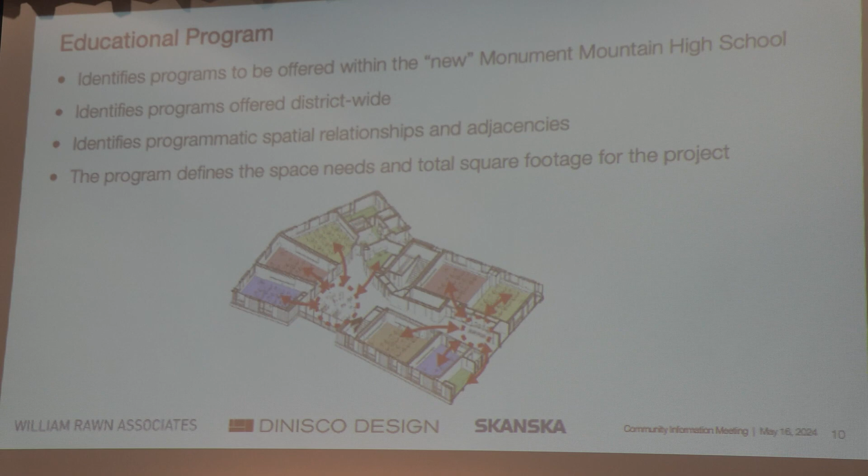So in addition to the spaces that are needed to support the program, we also want to spend time to really understand what the spatial relationships and adjacencies are. What's important there is so that you'll see what the priorities and goals are to create a collaborative environment. We want to make sure that we maximize time on learning, but we also want to make sure that the programs are co-located to support the entire student.

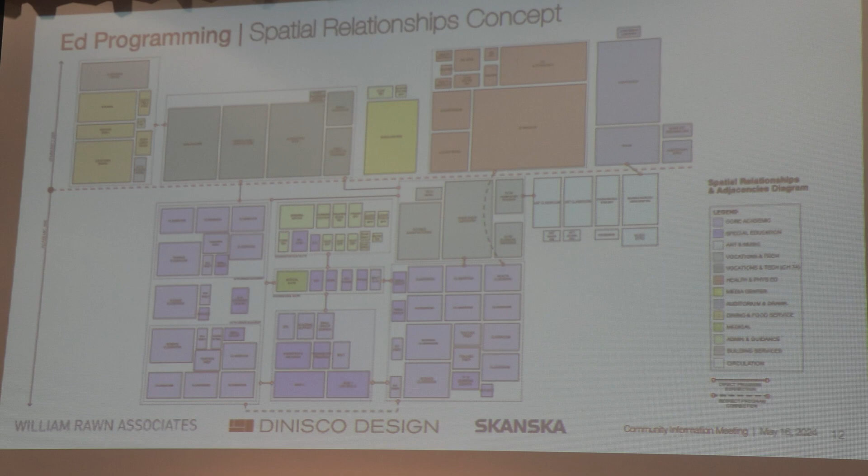We've spent a lot of time talking about project goals. We have heard from a lot of people. We are still looking for more input. So for all of you tonight, we'll tell you where you can log on and provide information, but we'll also have an opportunity for you to ask questions or even tell us what your goals are at the end of the presentation. But what we've heard to date is cost is pretty important.

It is an important consideration for any project. We recognize that, more importantly, here. And so we're very keen on making sure that we maximize every dollar that you have. What also is very important is the educational program, right? Making sure that it will withstand the test of time for the next 50 to 75 years.

It needs to be flexible and adaptable. And we need to create those connections between programs and disciplines. We don't want a wing just for CVTE and then the core academics on the other side. The dynamic engagement between the two will really enhance and supplement students' engagement and collaboration.

Health, safety, and welfare is an important component as well. And then sustainability is on the top of all of our minds as we think about climate change, and how we can actually improve the quality of our lives using less energy. And then as well, the community. We're all in this together. What can we do to support the community and the community use of the spaces?

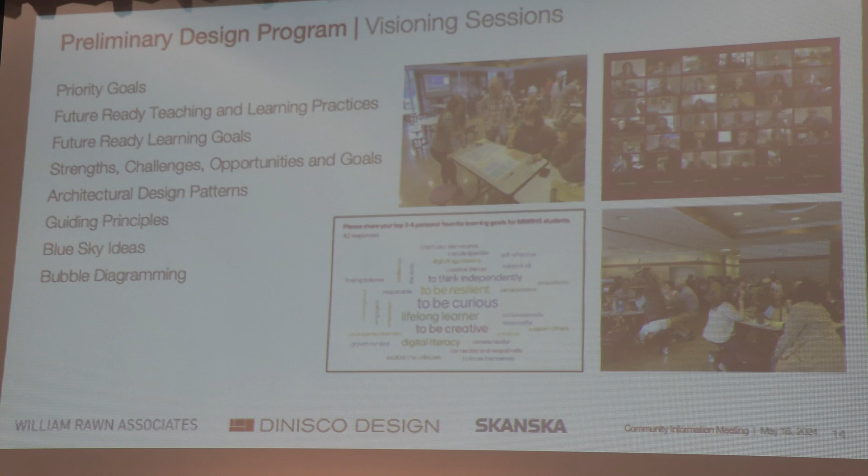We asked about design patterns, and we'll talk about that, and even some blue sky ideas. We had a great outcome from all of these engagements. I think we had 3 community meetings - we did one with the staff, and then one full one for the entire community.

So educational priorities, which really match what I just mentioned earlier: safe and welcoming, integrated program cross-disciplinary connections, flexibility, diversity and inclusion, collaboration, social emotional learning, which we all know is a really important component these days, our vocational opportunities and making those spaces accessible and appropriate for those students, visual arts, music, and performing arts, and then community partners, and also after-school programming. Again, how can we make sure this school is available for the entire community?

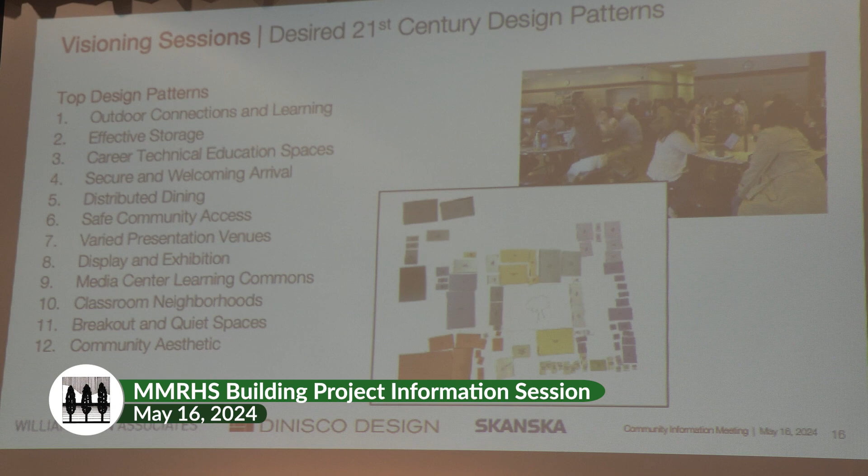We also asked people to start thinking about what are your top design patterns. It's kind of hard to think beyond what you know, so we started showing different pictures. We showed recent projects such as Mount Greylock, Taconic, and Wahconah, just to give people an idea of what you might be able to envision. And we heard you have an amazing site - we'll talk a little bit more about that.

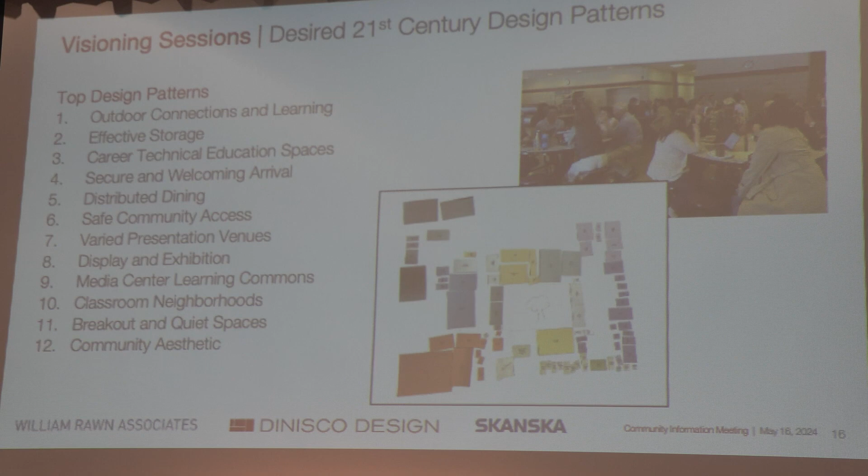The outdoor connections and learning really came to the forefront. Storage is really important as well - I don't want to go through the entire list, but even just display and exhibition space for these talented students would be really wonderful. Flexibility, breakout and quiet spaces, creating classroom neighborhoods for project-based learning and collaboration between students, and then making sure it fits into the community.

So with that, I am going to give you all a break from listening to me and turn it over to... I'm going to keep going on this.

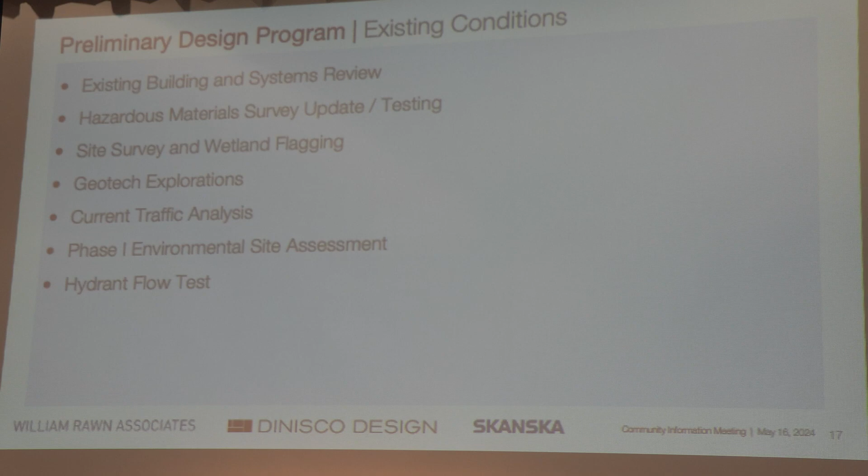Sorry, just joking. Okay, so while we were doing all of that, we were also kicking the tires. We came out, evaluated the building, looked at all of your systems. We confirmed the survey that was previously done, and we had to go through the whole Conservation Commission process all over again, so we had to do the wetland flagging and make sure nothing has changed.

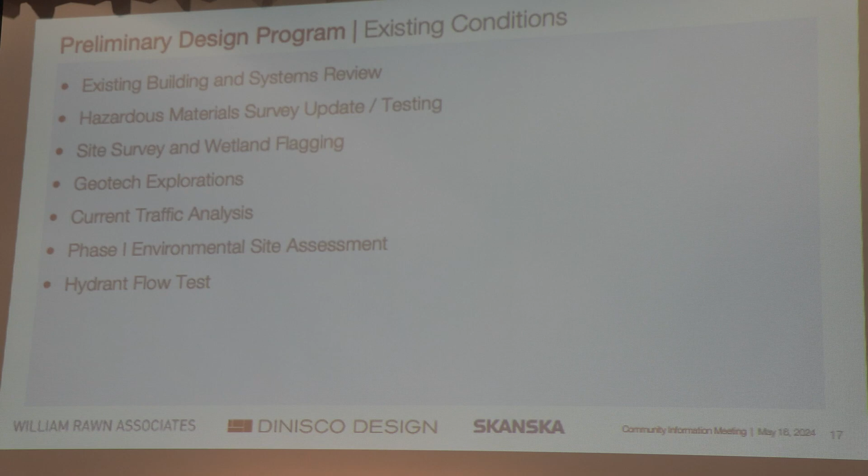We'll talk about the traffic - we understand how important that is, and we have done a thorough analysis on that. And then some minor miscellaneous items, making sure that you still have the deed and making sure that you have adequate water flow. So what have we learned?

As you all know, constructed in 1968, the building has probably served you well, but has probably exceeded its useful life as it is today. The windows are single pane original windows. They leak. The temperature going in and out of them makes it very difficult.

And so technology is dated, and safety and security are really important components that we didn't really think about back in 1968, as well as many doors, hardware, and everything else that really needs to be updated.

When we start looking at the spaces, suffice to say the original windows make it very difficult, drafty. You're in the cafeteria, poor lighting, even with all of those windows, not great natural light. Ventilation is a problem in most of the spaces as well. We're fortunate to have air conditioning in here.

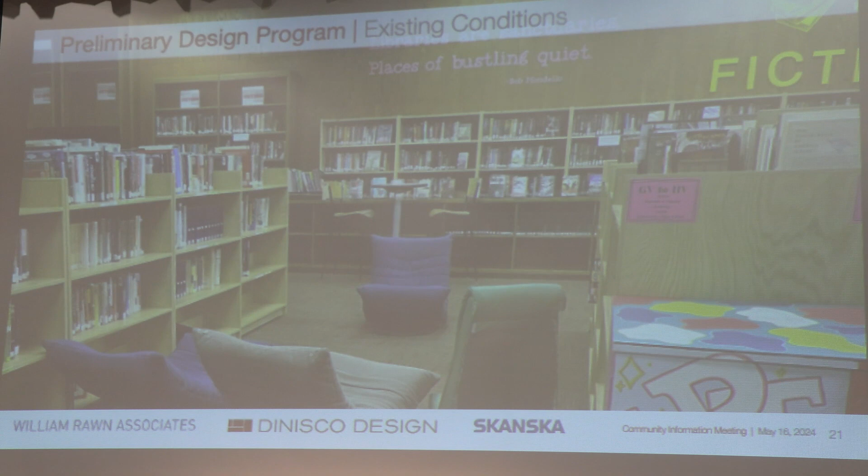There's very little area for collaborative work, for students to work together, for staff to get together and collaborate. No small breakout areas for any of the needs. Technology clearly is lacking. Even the light that's in there, while it's not natural, is also a challenge.

Your classrooms, your science labs, are undersized—significantly undersized to MSBA standards—but even just for today's programming they are fixed benches all the way around. It limits the flexibility and the opportunities that the programs could really benefit from.

We have a lot of classrooms that I think there's probably 10 that are interior classrooms. I don't know if anyone saw that—amazing use of existing space to do what you need to do. It would be great to have every program have windows and natural light, ventilation, air conditioning, technology.

Your art program, again, is just amazing—a pretty fun space here, but lacking light and technology. We go over to the woodworking, a great space, but we don't have the proper ventilation and all of the equipment needed to really support that program.

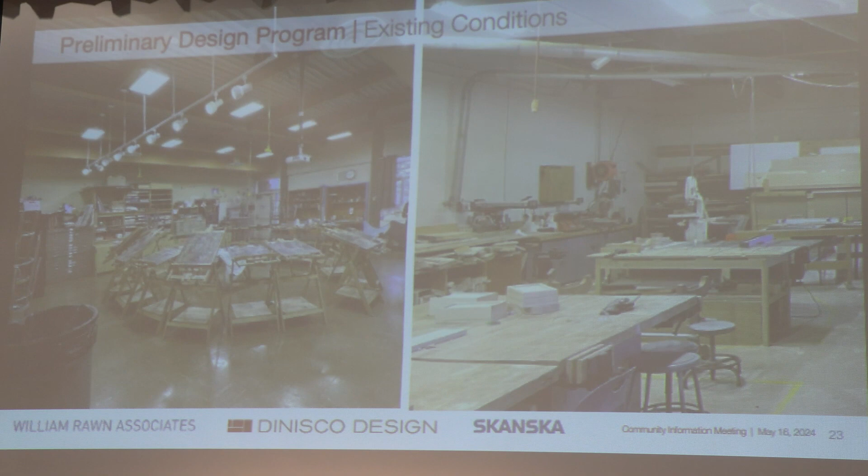So that's the existing interior descriptions. Now I promise I'm turning it over to Jeff.

Great, thank you, Donna. So in addition to the analysis of this building as a structure and also the program that goes on inside of it, of critical importance to the project is an analysis and a comprehensive understanding of the site which the building sits on. The district is also unique in that here's the high school, but here's your elementary school, and here's your middle school. The symbiotic relationship and an understanding of how that all works is very important to the success of any project here at the high school.

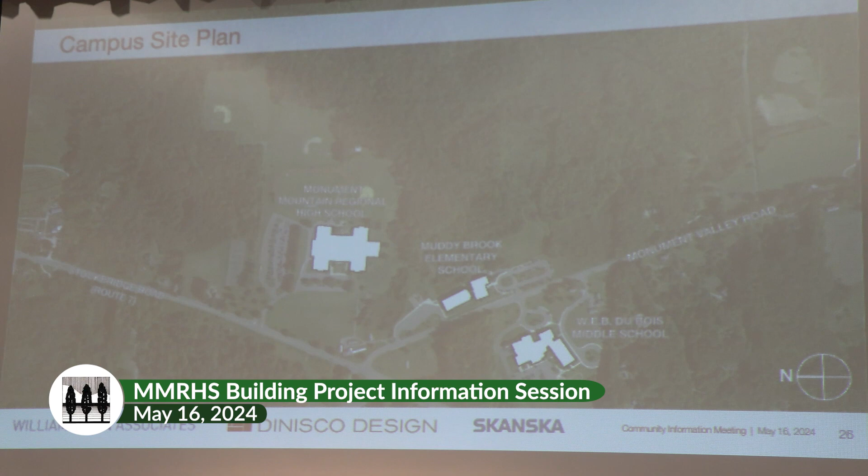A third major component is the natural environment on the site. You have a stunningly beautiful site here at Monument Mountain. We know there are wetlands on the site, so we'll be working, as Donna mentioned, with the Great Barrington Conservation Commission to make sure those areas are protected. We'll also be studying what areas below the surface are good for new buildings and how water moves through the site. Where does it go when it rains? How does the water get there? Does it pool in any areas that might make certain parts of the site undesirable for new construction, things like that.

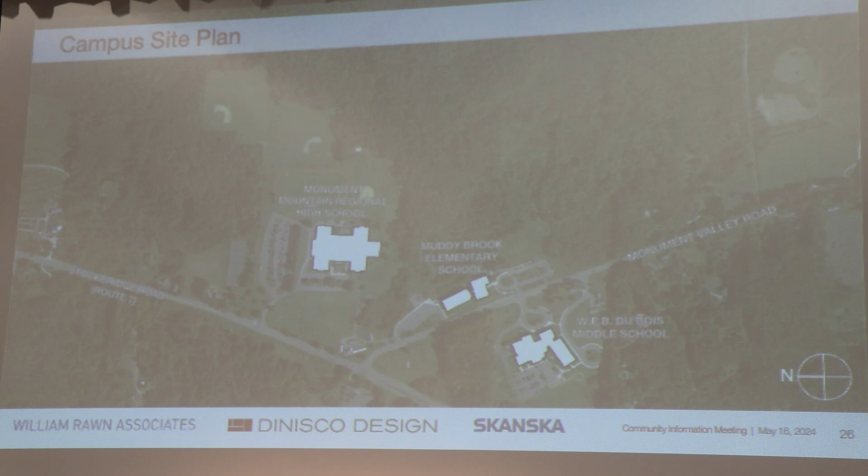We've heard the community's concerns over the safety of exiting and entering the high school site along Stockbridge Road. So one of the first things we did was perform a comprehensive site analysis of the campus.

We studied 3 intersections. The first is here at the driveway to the high school onto Stockbridge Road. We studied the intersection with Stockbridge Road and Monument Valley Road. And then we also studied the intersection across from the 2 other schools. We set up traffic counters along Stockbridge Road and Monument Valley Road, and between all these locations we were able to get very granular information: when the most traffic was arriving, when there was a lull at each intersection, who was turning left, who was turning right, who was going straight through.

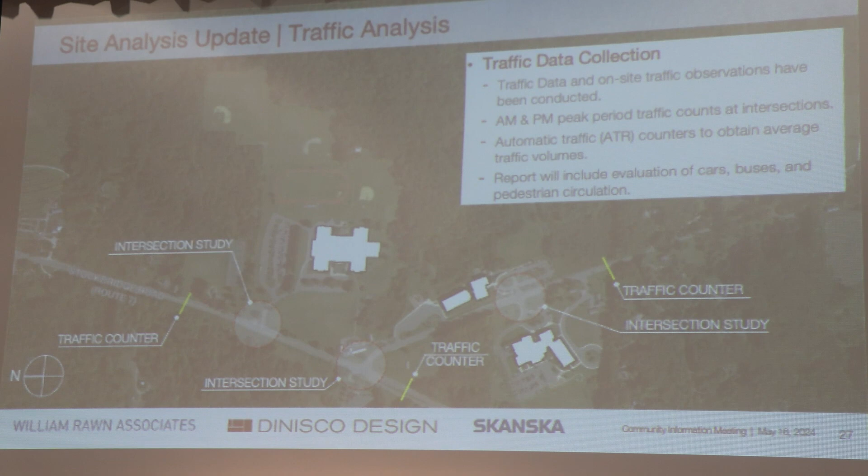So a comprehensive analysis of the traffic in this area will allow us to make recommendations or study some proposed interventions to improve traffic. We do have some considerations that we're studying as part of the project that we'd like to share with you. These are not final or proposed, but still in development.

One consideration might be the introduction of traffic circles or roundabouts along Stockbridge Road. This strategy reduces the rate of travel, slowing traffic down, which allows for increased reaction time, especially important with young or inexperienced drivers. The introduction of potentially a second traffic circle at the intersection of Monument Valley Road and Stockbridge Road would create a slow corridor, reducing the rate of traffic for a longer distance. It should also be noted that Stockbridge Road, Route 7, is a state road, so any intervention there would need approval and to be designed to Mass DOT standards.

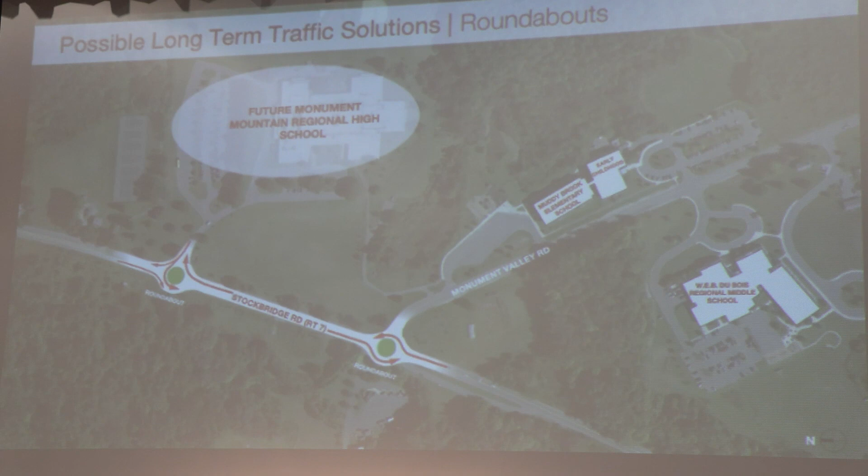Another potential strategy would be to make the driveway that currently exists at the high school one-way in only. That would eliminate the need to make a difficult left or right out of the school site, which is sometimes difficult when there are long queues of vehicles obscuring oncoming traffic from approaching the intersection. This would create a new connection down to Monument Valley Road, which is not a state road, so that would just be coordinated with Great Barrington, and all school traffic would flow out, controlled by the addition of signals or other means.

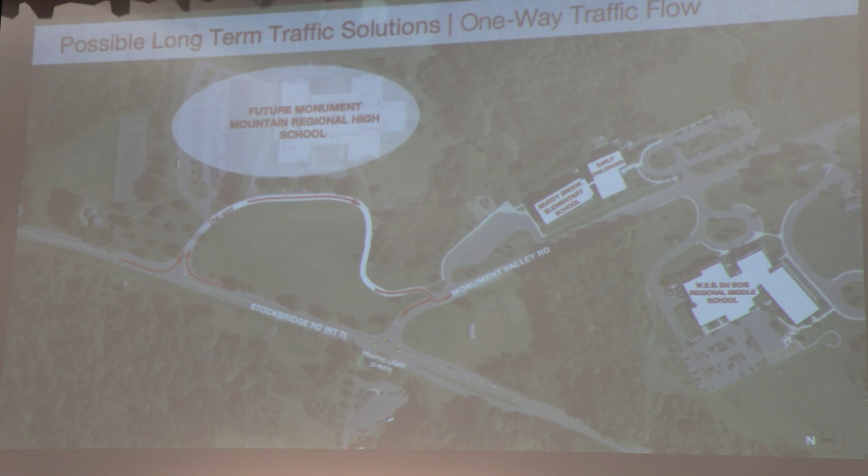A third consideration would be to get rid of the driveway in at Stockbridge Road altogether and use two-way traffic off of Monument Valley Road. Again, that intersection could be redesigned and controlled as needed. So these are three potential areas of study that the design team will be looking into as the project progresses.

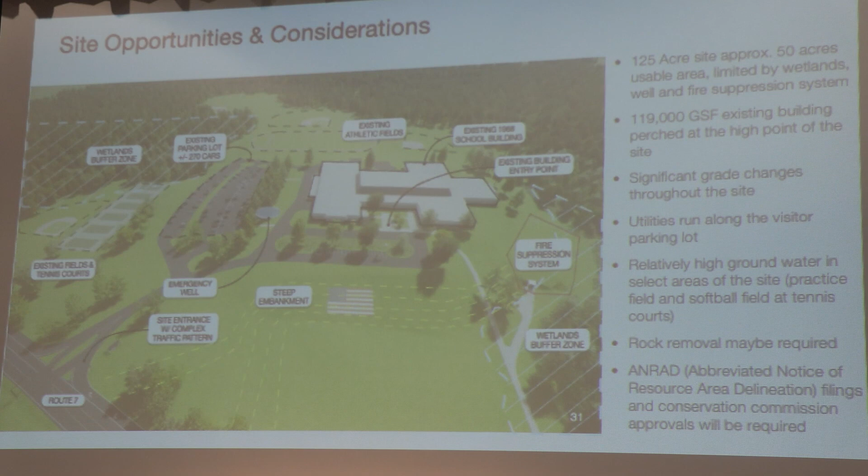With regard to our site proper, within the property lines of the high school, there are a number of opportunities and constraints that will inform us where on the site a project could potentially take place. Most notably is the existing building, about 119,000 gross square feet on the plateau on top of the school site. Working clockwise around this is the water storage facility, which we need to take into account in any site development. There's also the steep embankment out in front of the school, which the school uses so successfully in their messaging frequently.

There's the driveway off of Stockbridge Road here, which has a complex traffic pattern. We know that the existing parking lot has good capacity for the school as it exists. And one of the huge advantages to this site is the amount of play fields that you have in place. One of the things in evaluating the site for new construction, additions, or renovations would be to preserve as many of those as possible.

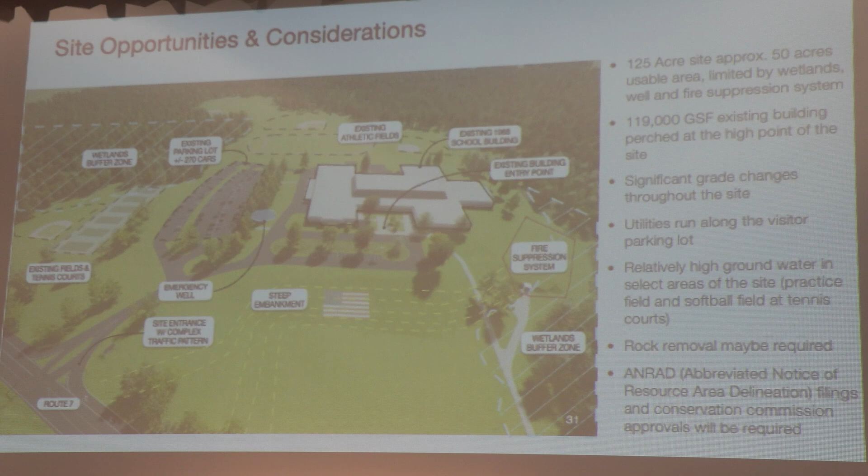So another first exercise that we did was to look at the site that we have and figure out, now that we're understanding the traffic and the utilities, where we could potentially have a new project. We identified these 8 areas, with D being any project at the existing building.

So there are really 7 areas that were initially under consideration for study for a new project. After reviewing with the school building committee, it was discovered that the locations at A and F were undesirable for new construction. The location up at A, way up in the northeast corner of the site, is pretty far removed from Stockbridge Road, thus reducing the visibility of any potential building back there. It would also require the extension of all roadways and utilities through the site to get to that location. So it was determined that that would not be desirable and wouldn't be pursued further.

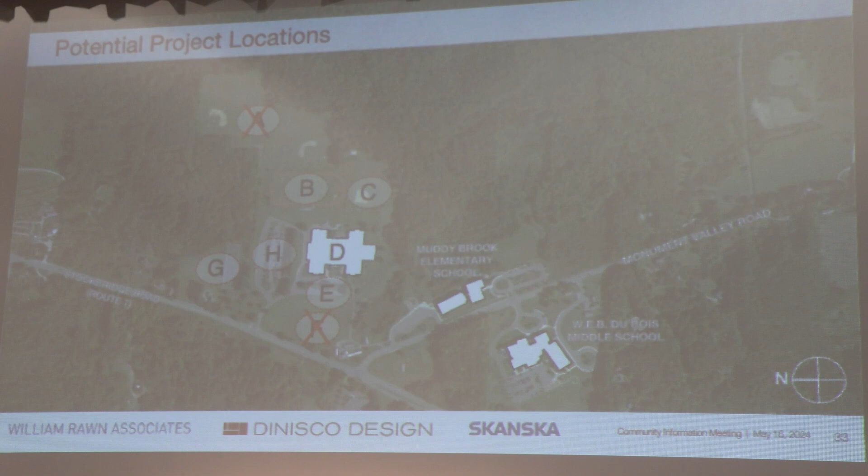Conversely, almost the opposite is the location at F, which is located right on top of Stockbridge Road. The proximity to the vehicular roadway, and the fact that it would obscure the hill in front of the school, were some of the considerations which determined that location would not be pursued further.

The next step was to take those remaining sites and get into a next level of detail. So you'll see some building footprints and site designs up here that are just for the study of potential building locations, and not meant to be, and shouldn't be misconstrued as proposed or final in any way.

So the study of the location at building B - we have some advantages and some disadvantages. Some of the advantages included that you still have great views out to Monument Mountain to the west and great views out to the east. There's a flat area located relatively close to the building for the potential of a ground source heat pump field, similar to what you have over at the middle school. Building in this portion of the site, you're staying away from the existing building and where all the utility connections to that building are made, so this could be done in a separate manner and not affect the existing school building, which needs to remain in operation and occupied during construction. The building is also centrally located to most of the athletic fields.

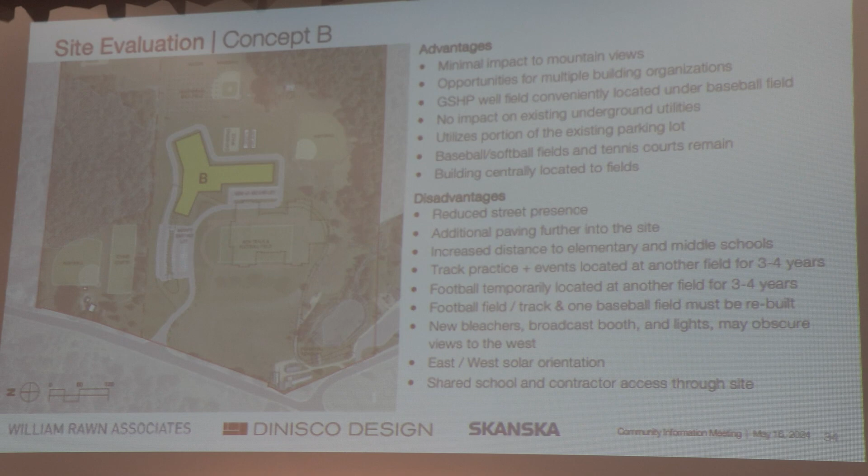Some of the disadvantages to that location are similar to A. It has a reduced street presence, and it's an additional couple hundred feet to the elementary school and middle school for foot traffic between those. The main disqualifier for this location is the fact that it's on the track, which is great because it's perfectly flat for construction. However, that track and football program would be dislocated for a number of years, 3 to 4 years, while the construction of the new building is in progress, while the demolition of the existing building is in progress, and they would need to wait for those facilities to be rebuilt. Not having another track or football field in close proximity to Monument Mountain was the main reason why this was determined as not desirable.

C is the location at the softball field to the south of the track and football field. There are a lot of the same components to C, and it was ultimately determined that this was not desirable as well.

So up until this point in the story, we eliminated A, B, C, and D is the existing building, and F. So Sam is going to review the ones that are still in the running. Let's hope something survives this process of elimination, right?

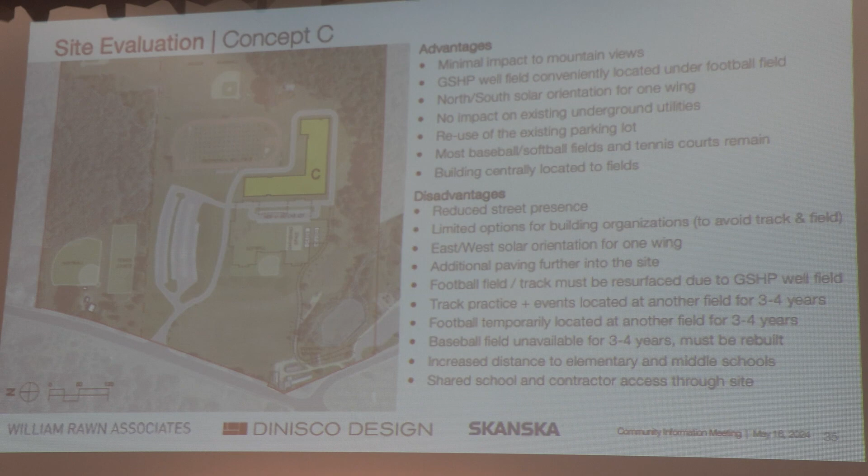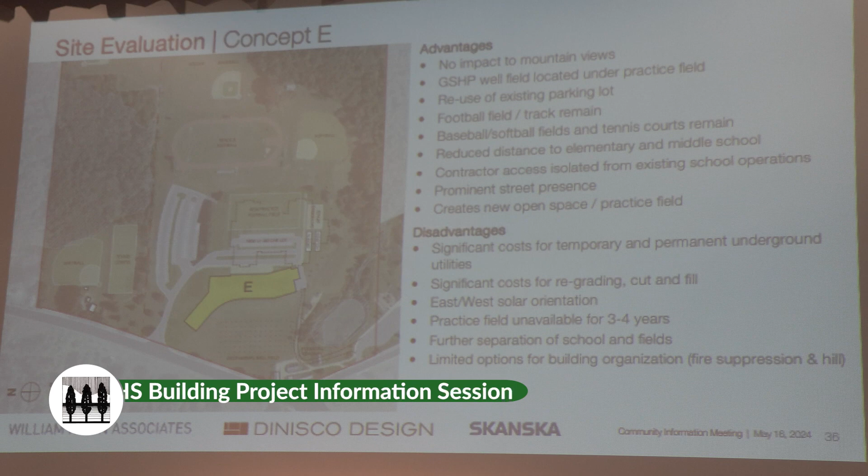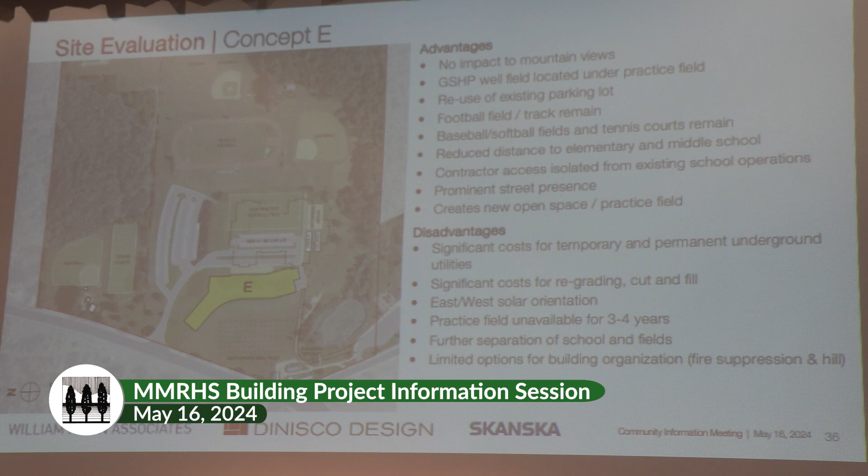One interesting possibility is Site E, on the crest of the hill. When thinking about how to build a new building while keeping an existing school in operation, you're looking for a site that doesn't end up on top of something you need to keep the school going. One of Site E's biggest advantages is that it's not on your existing parking lot, not on top of the track. It squeezes in between the playing field, the practice field along Stockbridge Road, and the existing school. So it becomes a pretty interesting possibility because it avoids getting in the way of existing things.

It's also possible, as one builds onto that hillside and excavates into the hill, to almost displace the hillside eastward, and at the end of this still end up with a hillside you can use for that kind of billboard effect, where signage or display sometimes gets put on the hillside. So that aspect of using the hill as a communication tool, where different things get messaged there, wouldn't have to be lost by building on this site.

You knew there was a 'but' coming, right? That's where the disadvantages come in. This site is pretty interesting, but building on a hillside is inherently more expensive than building on something flat.

So that will add cost compared to, say, building on a more flat site like on top of the track. And unfortunately, a lot of the existing utilities that serve the school run right at the crest of the hill, so building here would introduce the need to relocate and move utilities. That's dollars spent doing that, and dollars not spent building a classroom, let's say.

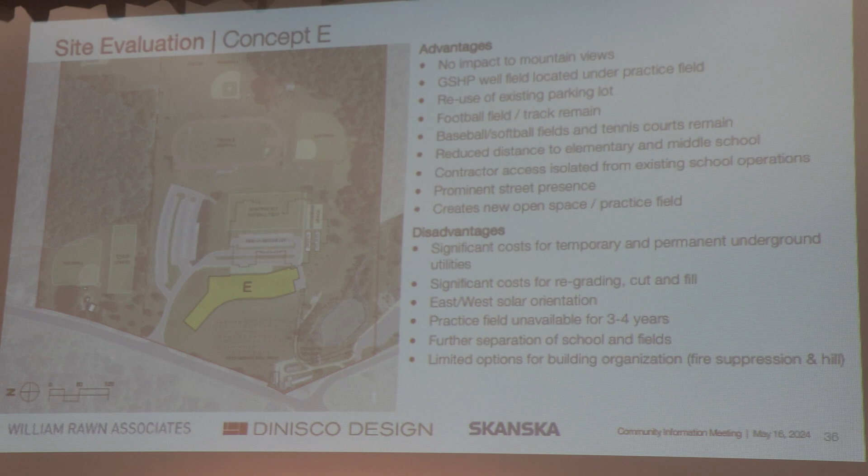One advantage that G does have, and this is also true of E, is that it's possible in both sites to set up a separate entrance for the construction company off of Stockbridge Road during construction, separate from how school buses, parents, or students arrive on site. So from a safety point of view, being able to separate the contractor's access from everyone else's is an advantage.

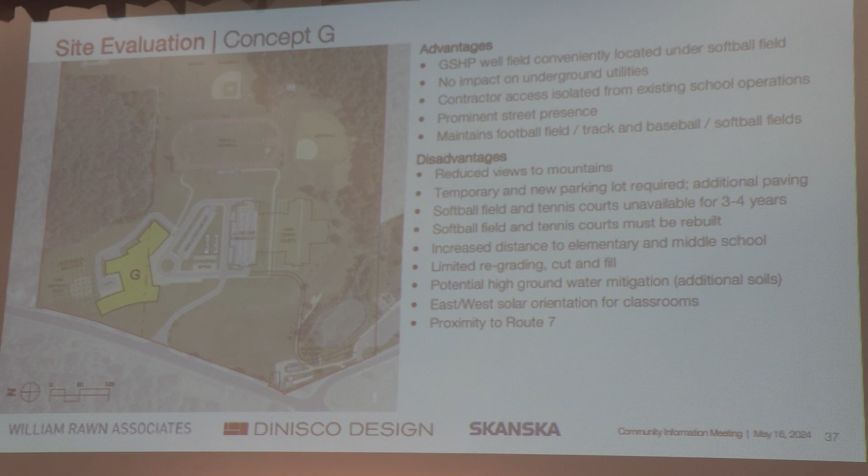The last site we'll talk about is Site H, just to the north of the existing school, on the parking lot. The parking lot isn't as flat as the track, but it's flatter, which makes it a little easier to build on. It creates the problem of what to do with parking while trying to keep the school operational.

So you might end up with parking down on that practice field, meaning a bit more of a hike, and building a temporary parking lot. Then, probably after construction is completed and this building is removed, you'd build the more permanent parking lot on top of the hill. So there's some cost associated with dealing with parking, but that cost might be less than the cost of excavating into a hillside like on Site E, or having to relocate utilities.

So there's some cost adds to this one, and our job right now is to add up the costs associated with having to deal with these things and compare those to the costs on Site E. How do they weigh out? Do they end up pretty similar, or is one meaningfully, i.e. millions of dollars, less than another? That's one of the things we're working on, and we'll report back on what we find.

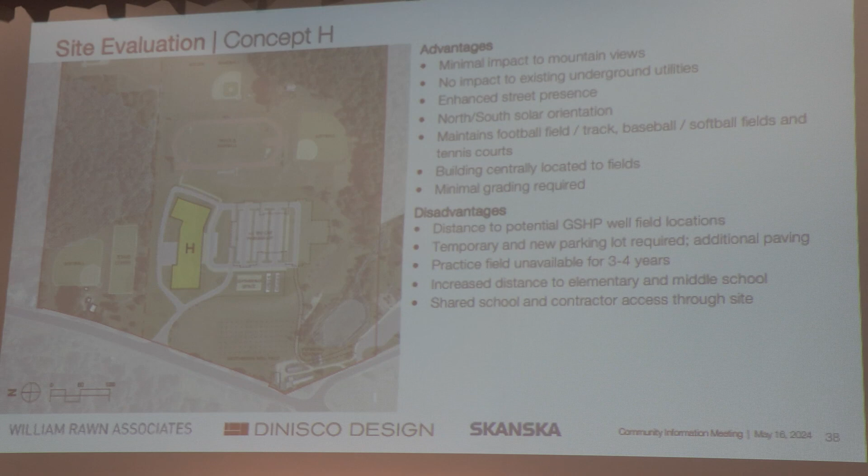Bottom line from all of that is that Sites E and H seem like the most promising of all of these based on this analysis of their pros and cons. Those are the ones we've been focusing on, really studying these cost pros and cons, and in discussions with the school building committee, believe it makes sense to continue to develop. And then, of course, D, the existing school, as Donna mentioned earlier, we will be looking at possibilities to renovate or add to the existing building. That is part of the MSBA's required process, to make sure that isn't a cost-effective solution.

Sometimes it can seem like doing an addition and renovation is cost-effective—you've already got the building. Sometimes it is, sometimes it isn't, because it can be very complex to deal with an existing building and have unexpected costs that might not be there right away. So does it save money? That's one of the things we'll be analyzing very carefully, so we're able to report clearly the pros and cons, from a cost point of view, between new construction versus an addition and renovation approach.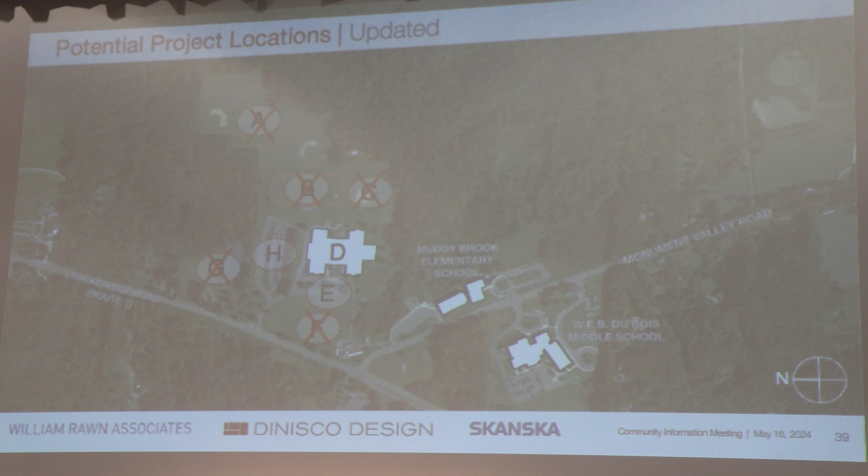I'll turn it back to Donna. I think, do you want to go through this? Please.

So cost is definitely an important consideration. We understand you can't truly read this chart—it's really just to talk through the process. What we want to do with the remaining options is evaluate them objectively, to understand your priorities and the criteria we want to use to weigh each option against each other. Cost is a major consideration, but so are the educational considerations. One option may have better programmatic organization, one may have better ways for public-facing programs to function, one might be better for the site.

So we're going to look at these options. And again, I think the renovation addition option is going to have multiple layers to it—one might be a minor addition, one might be a major addition. So we'll be presenting these shortly, and then having a conversation on the cost, education, the building, and the impacts and benefits of each of the schemes as it relates to the layout of the building.

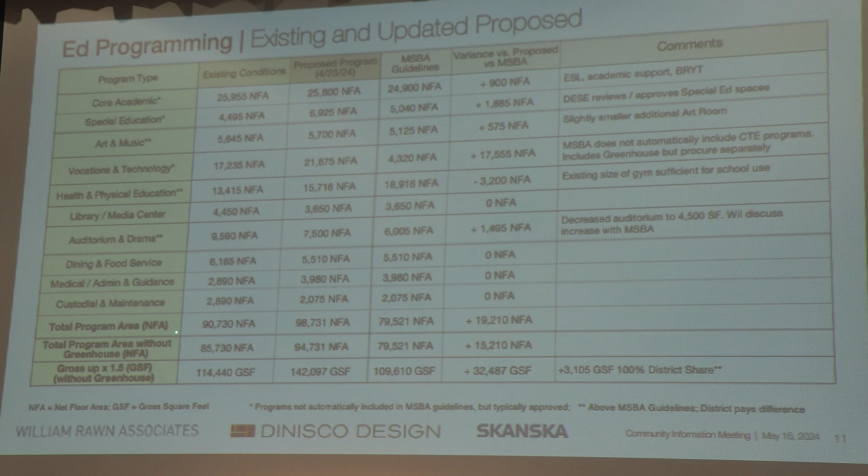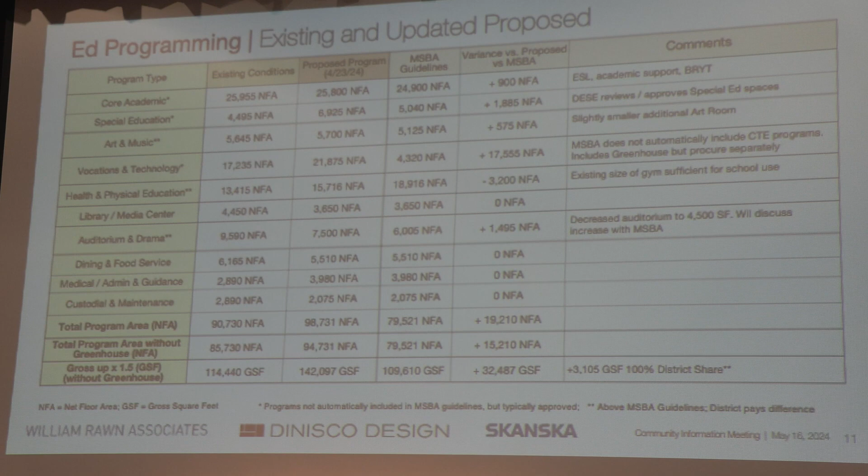What we should probably focus on is the program allowance, as you were alluding to. We're confident, with the exception of the increased space for the auditorium and perhaps the additional art classroom, that MSBA will support the educational programs you currently offer. Every district is different, and a lot of times they just put on the minimum amounts they believe people will need. But because, for example, your special education has two substantially separate programs, those programs are needed, they're important, and you have other support programs to support all of the students. So we're confident anything related to the educational program MSBA will support.

It's the additional art room and the additional square footage for the auditorium that they'll most likely say they will not participate in. And is that what accounts for the 19,000 square feet overage?

No, so here it's 19,000. Where you exceed their guidelines, one of them's under health and physical education. Your CTE programs are the lion's share of that overage. And again, not every community has robust CTE, let alone Chapter 74 programs. So they don't automatically include that space in their guidelines because not every community has that.

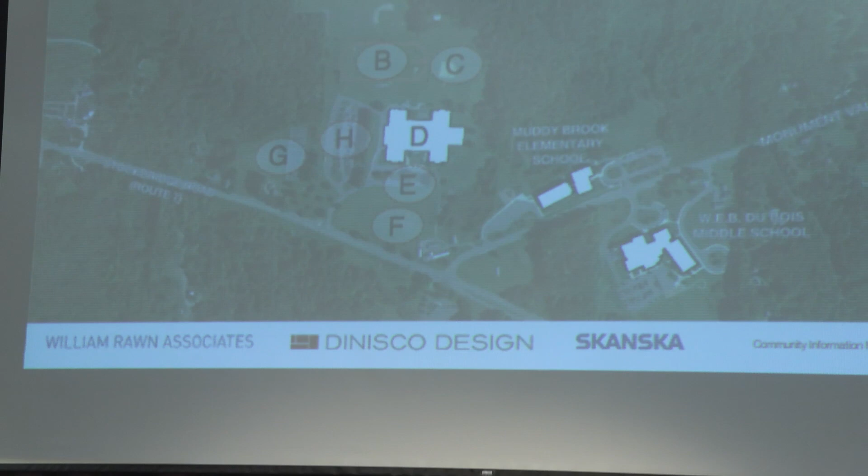The back hill, like in between B, C, and D, right in here. Anything that we put in that area is very similar to, I think, what Jeff was alluding to, but there's not probably sufficient space without intruding on the track, the base, and the football field. There is a slope down as well, so similar challenges to E, not to that extent, but we certainly would have those challenges. And I think primarily it's going to be lower than the existing building, and you're going to lose that presence on the hill. So it was a combination of all of those.

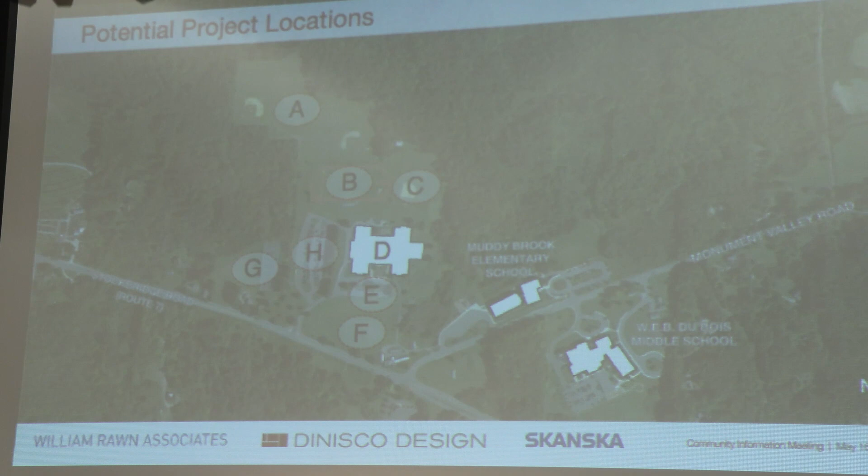Hello, I'm Jenny Clark. I'm so impressed with this presentation. I feel confident that we're going to get a really sensitive design. I'm very worried about the cost because of the issues facing this town, so that's one of the main reasons I'm here. I don't want to see an overblown design solution, and I feel confident that you're not going to give us that. But I just have a few questions.

The 485 students that you are designing toward is only a few more than what we have now. That was given to you by our powers that be here, I take it. That you didn't further refine that from any statistics, or did you? No, so that was an agreement between the district and the Mass School Building Authority. Our partner has their own formulas when they think about enrollment projections, and they do forecast that out 10 years. They take all of the information provided to them by the district, they actually look at housing changes, any kind of builds that may be coming online in the district, and then they go through their enrollment projections. It was agreed upon by the district, but it was generated primarily by them. Do you want to add to that, Christy, about the number of students?

It seemed that the schools designed for the two better sites had different sized buildings. The building sizes looked different, and perhaps that was an optical illusion because of the configuration. We all used the same square footage, 140,000 square feet for all of them. It's funny how the optics really change going from E to G. G looks fatter, but it's the same gross square footage, just the placement of spaces.

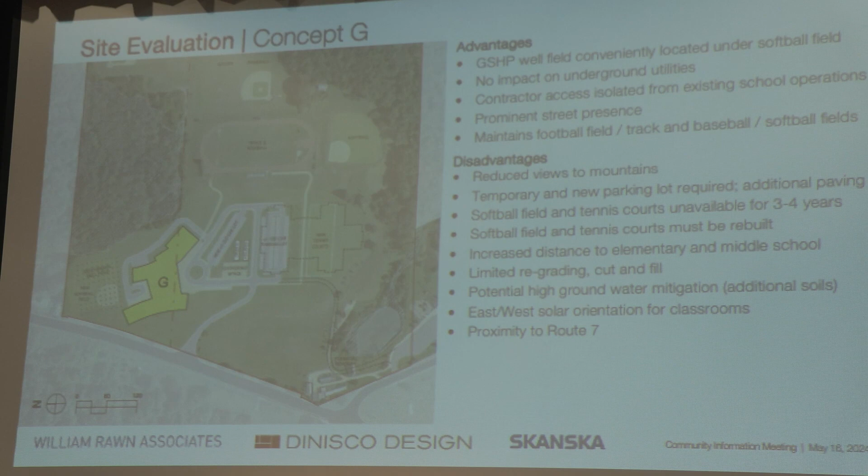And the last thing I wanted to ask, could you or Jason clarify what was meant by the funding has changed since the last vote 10 years ago?

Yes. The formula for which capital projects are funded through the 3 towns in the district changed after a vote, I want to say 3 or 4 years ago, where all 3 towns unanimously approved a shift in the budget. Basically, Stockbridge would be paying more and Great Barrington less, a more equitable shift of the tax burden throughout the 3 towns at the time.

I'm so uninformed. I'd really like to know more about how that happened and what those ratios are now. But that's for another time.

I think the question is about when we eliminated option B, which was building a new school on the existing field. Why didn't we explore other locations for the football and track teams to use while the school is being built on it? I think so, okay?

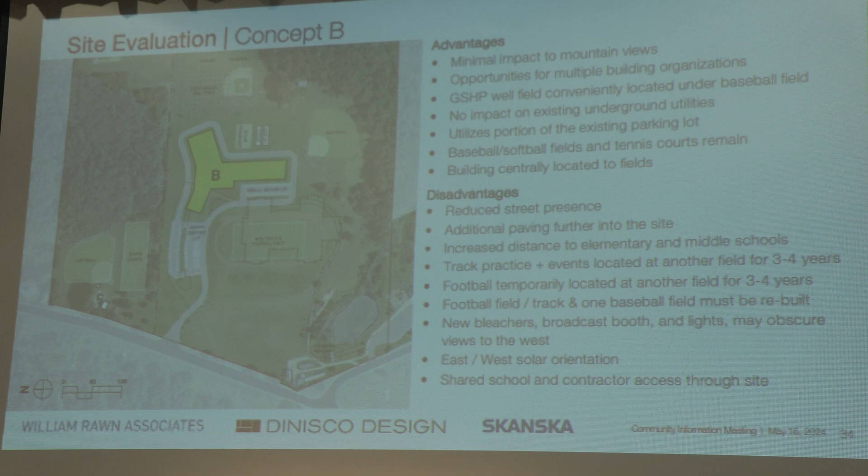Donna, do you want me to take that? So when the building committee met and discussed that location and the track, there is no other track available in Southern Berkshire for our teams to travel to. In fact, not only is there no other track available, but we currently host other schools at our track that don't have their own. That was problematic. I think it was Site C that was down behind the school on the softball field, so there was the same problem with the track because of the staging needed for that building. In addition, the proximity to our current space with construction underway while we're actually in the building trying to have school, we felt was going to be problematic.

Also, the cost of a new track, a new stadium field — that's not just football, but soccer teams, the lights, et cetera — is in the millions and millions of dollars that would be added to the project. So the cost of relocating the track and lights was a huge financial factor.

Hi, my name is John Gelder. Donna, I was wondering if you could speak to this — I know that a renovation or renovation addition would be pretty disruptive. Can you elaborate on that from your experience with other districts, what that looks like, and what mitigation measures are asked of the students and the school?

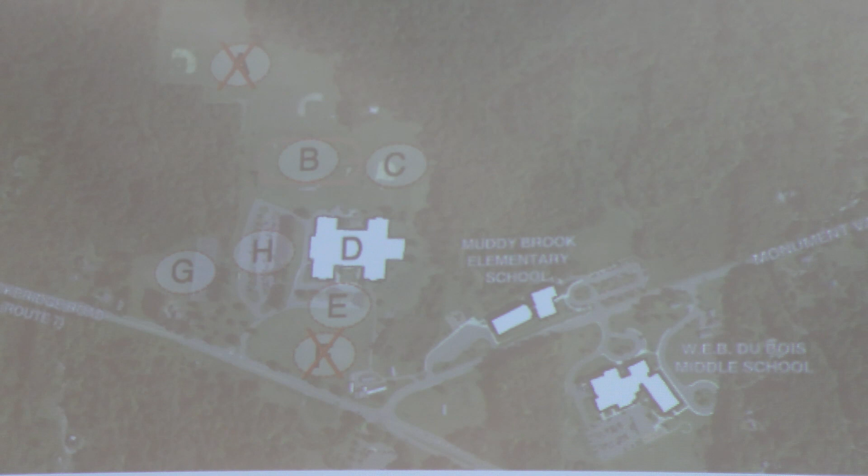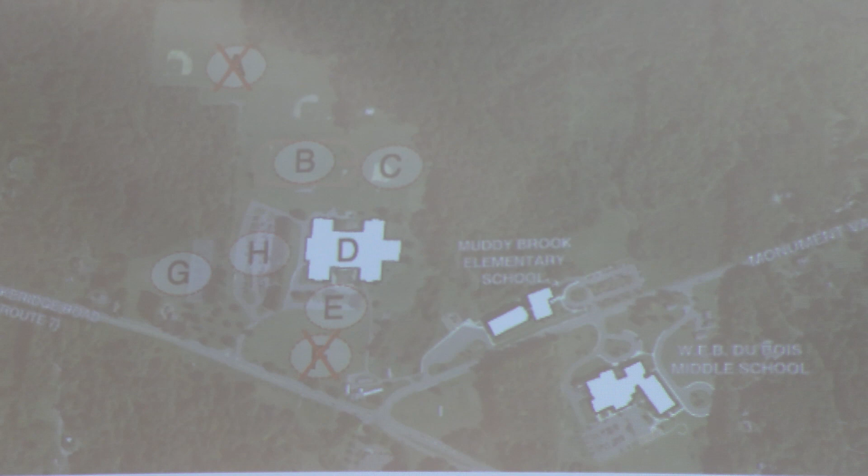The question is what's the best way to do it? Is a minor addition and a major renovation worth X? We don't know what that X is and the duration of that renovation, as opposed to maybe a very large addition keeping the core of this building and connecting it. That has a lot less disruption because we can build, move everyone in, and then come in and renovate these spaces. So depending on the level, we understand there will definitely be inconveniences.

Yeah, thank you. Yeah, thank you.

I have two questions from virtual attendees. The first is from Richard Lee: Is it 100% that the traffic will be reconfigured, or is this optional?

We have not decided what the solution will be to improve the traffic. Our goal in any solution is to improve the traffic, so I don't think it's optional. It will be one of the considerations and discussion points as we continue to evaluate and determine the solution. But we understand the importance of safety and how difficult it can be, and so we will be proposing probably multiple solutions on how to mitigate the traffic, both internally as well as at the intersections.

Okay, and the second question is from Vivian: Has there been similar examination about space for a total classroom and lab addition, but keeping and just renovating the gym and auditorium? Yeah, I just used that as an example, actually.